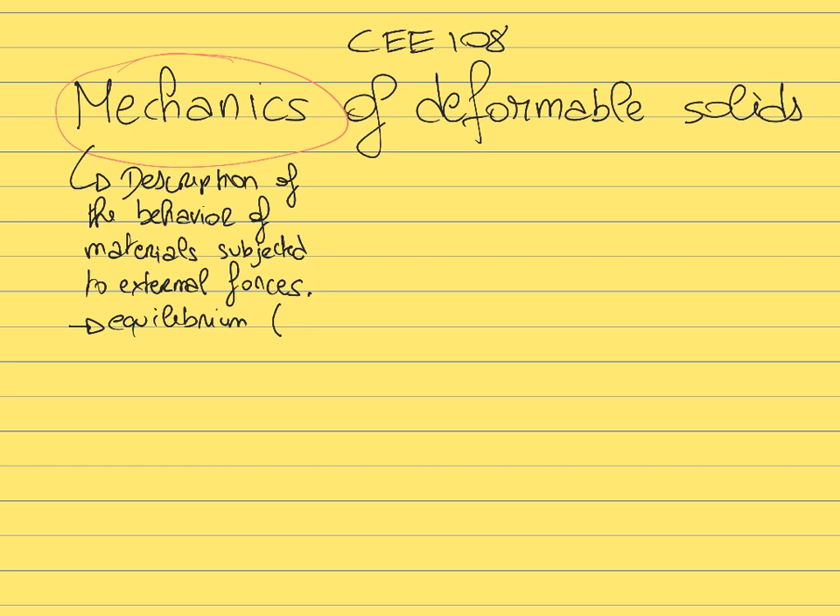For example, if you have a material that is placed on a table, and if you apply a force on this material, it means that, if the material is at equilibrium, the table will also apply a resistance force on this material that will be opposed to the force that you are applying. So the forces must be balanced. That's what you saw in the statics class. So statics is pretty much the fact that the sum of the forces and the sum of the moments must be zero if the material is at equilibrium. So that is statics.

The second thing is, if you apply some forces on the material and this material is not at equilibrium, then the second type of behavior that will be exhibited by this material is actually a motion. So that's the second thing that a material can exhibit. If you apply a force, this material can actually move. And so this is what we talk about in the dynamics class, that some of you might be enrolled in at the same time as this class.

So everything that describes the kinetics and the kinematics of motion of materials that are subjected to some forces and that tend to move due to those forces, this is what you describe in the dynamics class. The dynamics class will explore what is the relationship between the force and the moment that you apply to solids and the motion that they will exhibit as a consequence of those forces. So this is not something that we are going to talk about in this class.

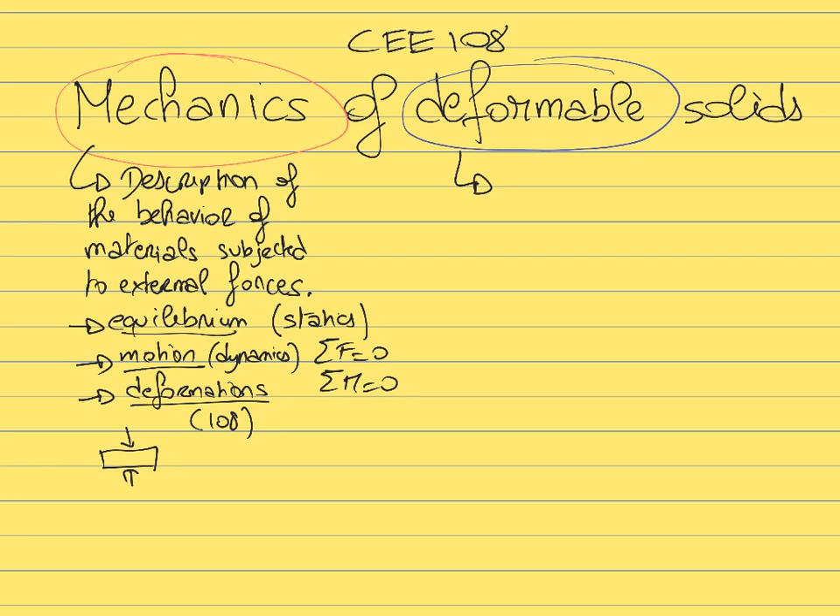So the second thing to define is, how do we define what is a deformation? What does it mean to be deformable? In this case, a deformable material is a material that can change either its volume or its shape. So those are the two types of deformation that we can have. Either a change in volume: for example, if you apply a hydrostatic pressure on a given material, this material is typically going to shrink.

And the other type of deformation that you can have is simply a change in the shape of this material. So for example, if you apply a shear deformation like this, materials can change their shape without necessarily changing their volume. So the deformation of materials can be either a change in volume, an elongation, a shrinkage, or a change in shape.

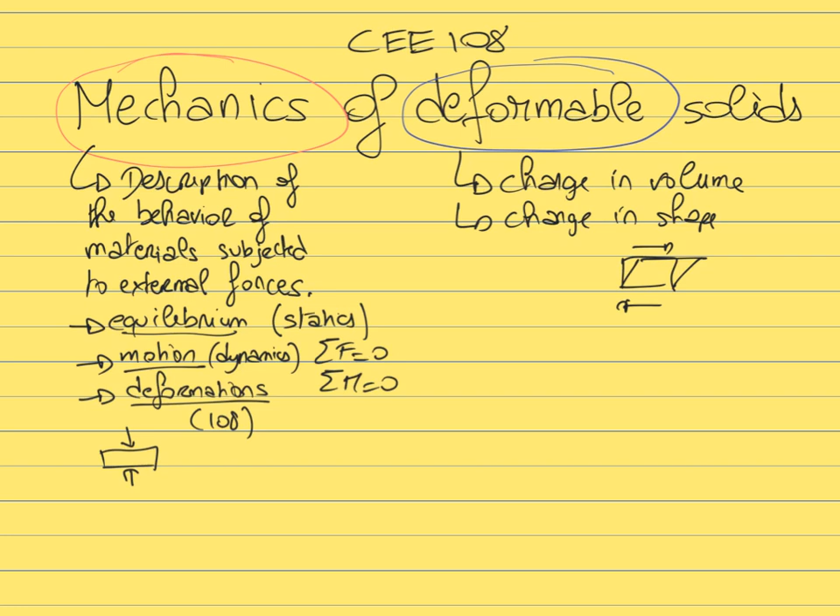So what we are going to talk about in CEE 108 is primarily two different consequences of external forces that are applied to materials. Once you have some external forces or some external moments that are applied to a given solid, the first thing that this external force will induce is that it will generate some internal load or some stress within the materials.

So you have a given material, you apply, for example, a three-point bending external force like this. Those are the external forces that are applied by an external agent, by something outside of the material. Those forces are going to result in some internal forces within the material itself, some internal load. So that is the first consequence of the external forces: you're going to have some loads that form within the material.

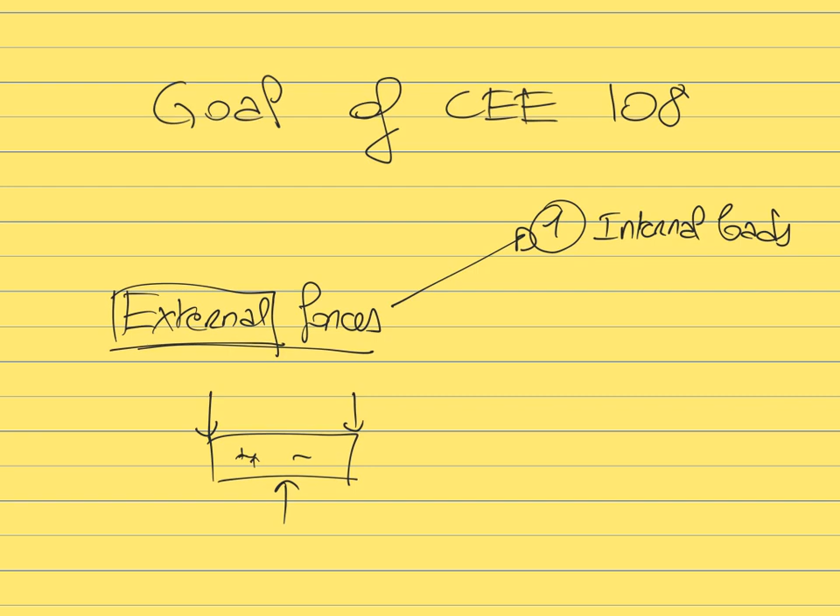Another way to describe this, which we are going to talk about in the next chapter, is that there is going to be the formation of some internal stress within the materials. And because of this stress, at some point there is a risk that the material might break. If the stress becomes too high, there is going to be a risk of fracture.

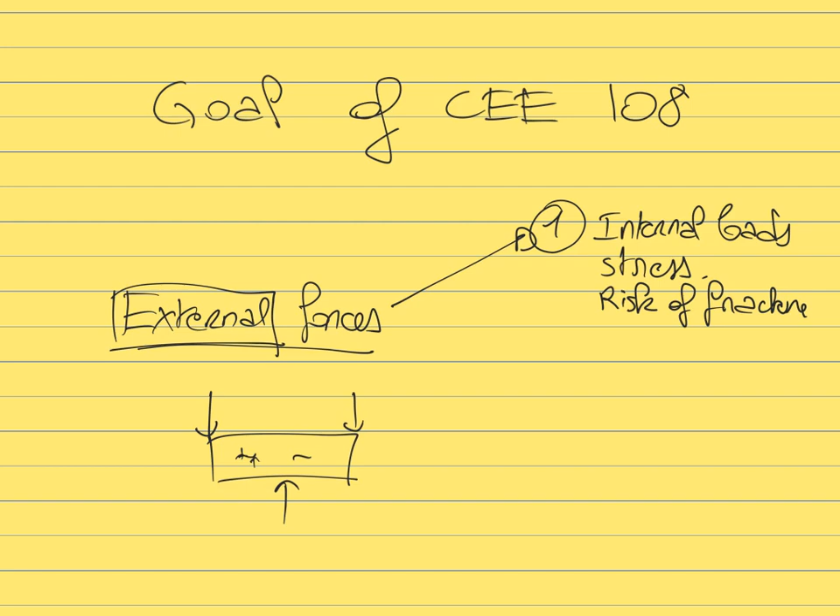So that's the first thing we are going to talk about in this class: if you have external forces, how do they induce an internal load, or can we find the relationship between the external forces applied to a material and the internal loads forming inside this material? And if we can predict the internal load and the internal stress as a function of the external forces, then we can predict how likely this material is going to break. What is going to be the risk of fracture?

The material is going to break if the stress forming within it exceeds the strength of the material. We're going to re-talk about this, but this is an important thing: understand the relationship between external forces and internal stress, which is useful to predict whether this material is going to break or not. So this is going to be about the risk of fracture.

The second thing that we are going to talk about is not simply the internal load and the internal stress, but also the other thing that a material can do, even if it doesn't break: these materials can be deformed. So we are going to talk about the internal deformation that a material can exhibit once it is subjected to some external forces.

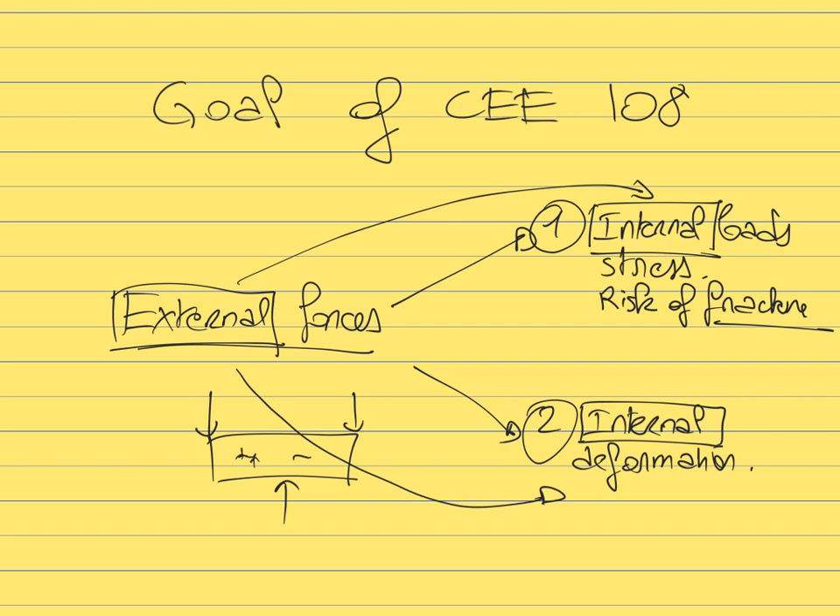So again, in this case, we want to find the relationship between the external forces or the external moments that are applied to these materials, and the internal deformation that occurs inside the materials. So basically we want to understand the relationship between the causes of the deformation, which are the external forces.

This is what is going to cause the deformation of materials. And we want to find the relationship between this cause and the consequence, which is going to be the response of the materials. And there's going to be two types of response that we are going to be interested in. First is the deformation of the materials: is this material going to be deflected, for example, or elongated or shrunk? Or what is going to be the internal stress, which is going to tell us if this material is going to break or not.

So this is going to be really what we are going to do primarily during this entire quarter. The goal of this class is to find the relationship or the link between the external forces that are applied to materials and the internal behavior of these materials. Internal load first, which is going to tell us if the material breaks or not, and the internal deformation, which is going to tell us if this material is going to be deflected or not, or how much deformation it is going to exhibit. And we want to find this relationship between the external things that are applied on these materials, which are the external forces and external moment, and the internal behavior of these materials.

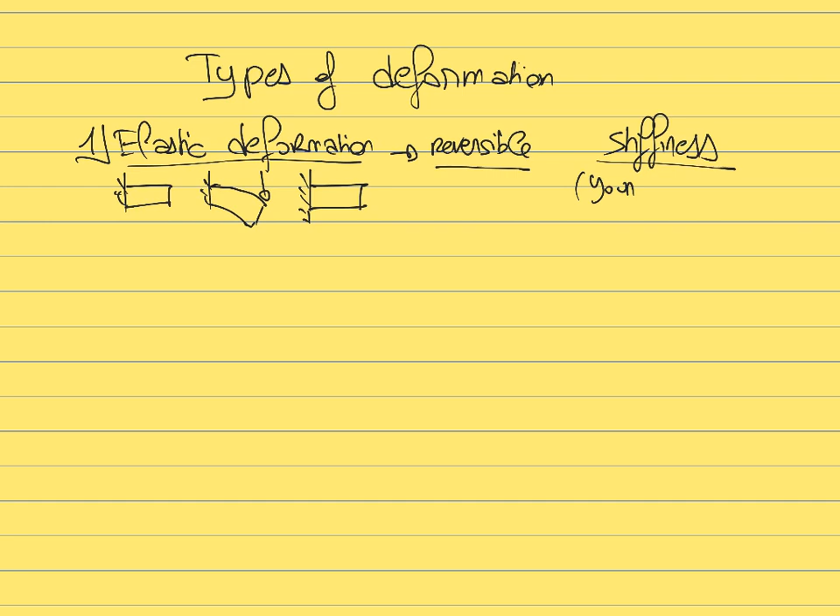So if a material is very stiff, then it will exhibit very little elastic deformation. And if a material is not stiff, then it will tend to exhibit a lot of elastic deformation. So the stiffness can be characterized and quantified by either the Young's modulus or the shear modulus, depending on if you characterize the stiffness of materials when subjected to axial load or transverse load. So those moduli will characterize how stiff the material is.

So we are going to talk about this again in a few chapters when we are going to talk about the mechanical properties of materials. But the first thing to remember is that what characterizes how much elastic deformation a material can exhibit is governed by its stiffness.

The second behavior that materials can exhibit if they are subjected to some external forces, another type of deformation, is that those materials can break. They can exhibit some fracture. So now we are talking about the case where you have a given member like this. You apply a given force to this material, and this material starts to break. So what does it mean to break? It means that you have a crack that starts to propagate, and eventually this material becomes made of two pieces. You used to have one single material, and now it becomes two pieces, which means that it has broken into two pieces. So this is the definition of a fracture.

You have created some new surface. So now, as a result of the fracture, you have some new surface that has been created. This new exposed surface that used to be inside the material is now exposed to the outside. So in this case, the deformation that is a consequence of fracture is not reversible. You cannot simply put back the material like this and hope that the material will become cohesive again. You would need to glue the material back, for example. So fracture is a non-reversible process.

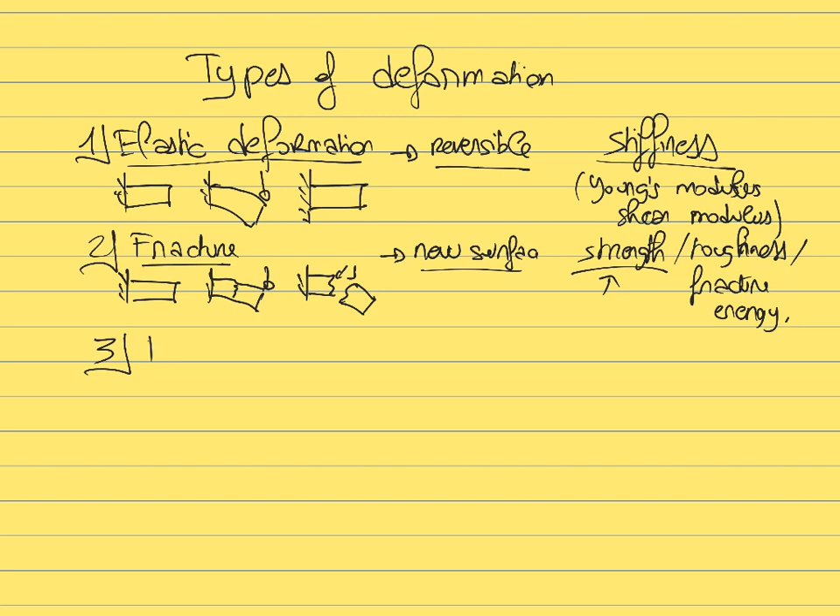Then the third type of deformation that can occur in a material is plastic deformation. So that's another type of potential deformation. So you consider still the same member. You apply a given force to this member, and this member is going to be deformed. But in the case of a plastic deformation, the material does not break, so this is not a fracture, but it differs from the elastic deformation because the plastic deformation is irreversible.

So that's the key aspect of a plastic deformation, is that unlike the elastic deformation, a plastic deformation is irreversible. Once you apply the load, the material is deformed, and once you remove the load, the material remains permanently deformed.

It doesn't go back to its initial shape or doesn't go back to its initial volume. So in this case, the key property that will govern the propensity for a material to be deformed plastically or not is going to be first the yield stress. The yield stress is the minimum stress that you need to apply to a material to induce some plastic irreversible deformation. Or another potential property is the hardness, which characterizes how resistant a material is to plastic deformation. If a material is very hard, then it's very resistant to plastic deformation.

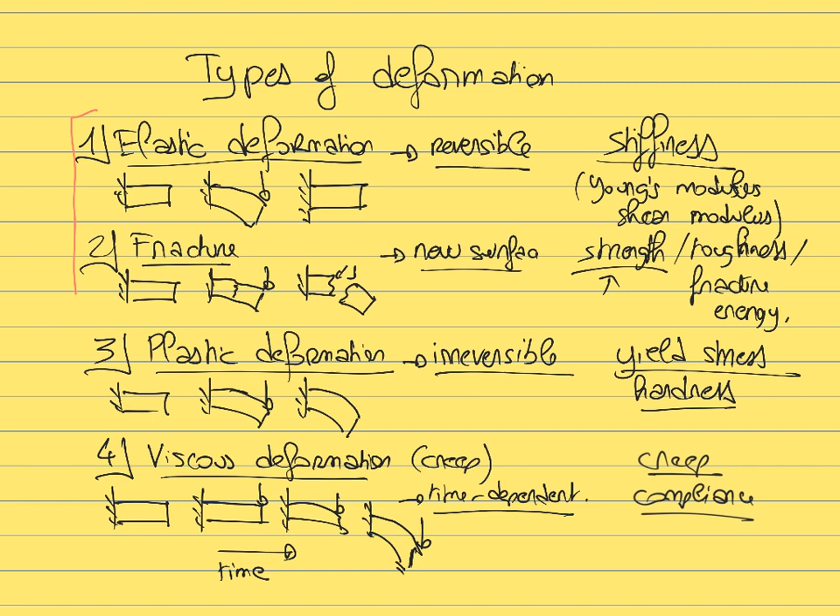And in this case, the key property that governs the resistance of a material to these types of viscous deformation would be, for example, the creep compliance, which dictates how resistant to creep a given material is when it is subjected to a constant load. So what we are going to talk about mostly in this class are primarily the first two types of deformation: the elastic deformation and the fracture. We want to predict how likely a material is going to break, and if it breaks, in which direction it is going to break. And we want to predict the elastic deformation that the material can exhibit when subjected to some external load. Those are the two things that we are going to focus on in this class.

One thing to note here is that there are different types of properties. There is the stiffness, which characterizes how stiff a material is. There is the strength, which characterizes how strong a material is. There is the hardness, which characterizes how hard a material is. In common language, if you say something is very stiff or very strong or very hard, in many cases, we use those terms interchangeably, as synonyms. But in the field of mechanics, those terms denote different things, right?

So if you say a material is very stiff, it means that this material is very resistant to elastic deformation. It doesn't tell you anything about whether this material is going to break or not, or about the risk of plastic deformation. It's just telling you that it doesn't show significant elastic deformation. If you say it's a strong material, it doesn't tell you anything about the elastic deformation. It's only telling you that this material can sustain very high stress before breaking, so it's not likely to break. So that's what a strong material is.

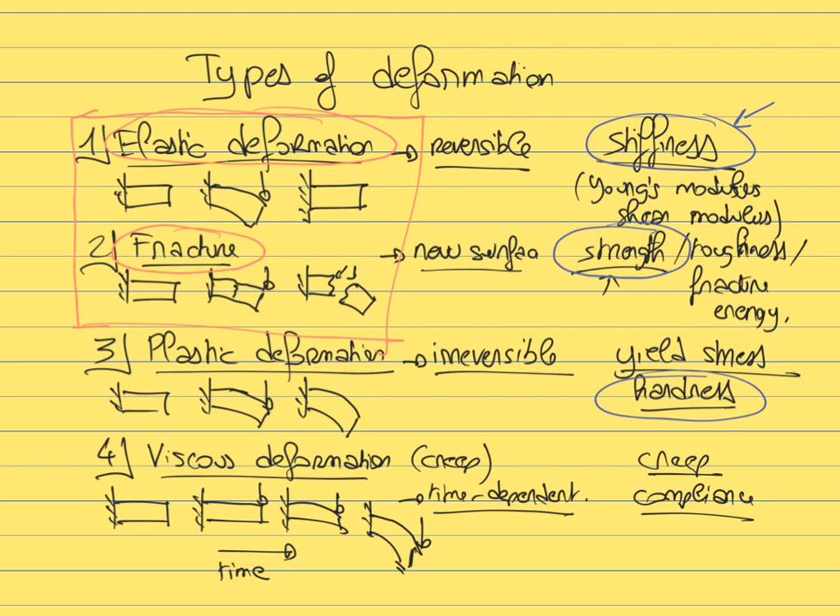So depending on the forces that are applied to a material and the direction of those forces, and depending on whether moments are applied or not to a given material, a material can be deformed in several different ways. Certain types of deformation will change the volume of the materials, while some other deformation will simply change the shape of the materials. So in this class, we are going to talk about primarily three different types of geometrical deformation.

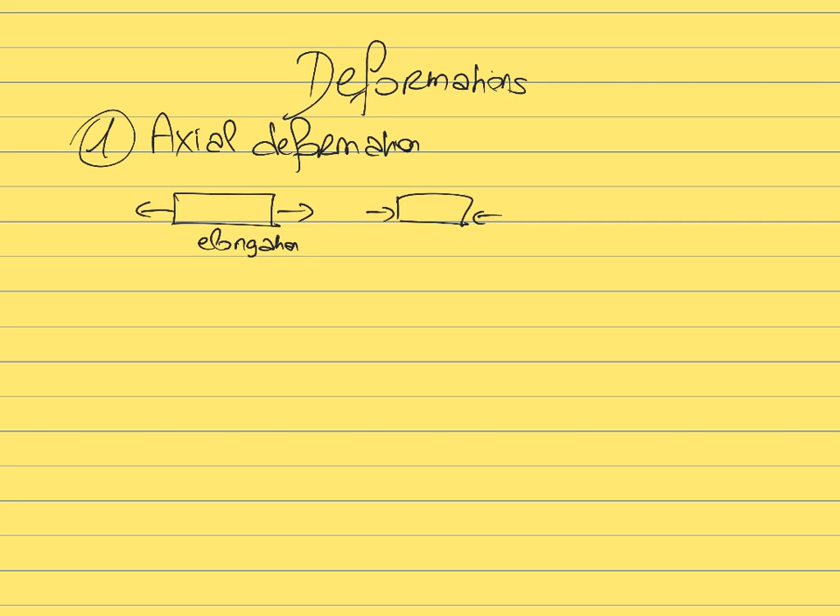The first one will be the axial deformation. So in this case, we will be talking about what happens if you take a given material and you apply an axial load like this. In this case, you will have an elongation of this material, or you can potentially have a compression like this, and in this case you will have a shrinkage of this member. So that's the first thing that we are going to talk about. This is what happens when you apply a load that is axial along the longitudinal axis of the material.

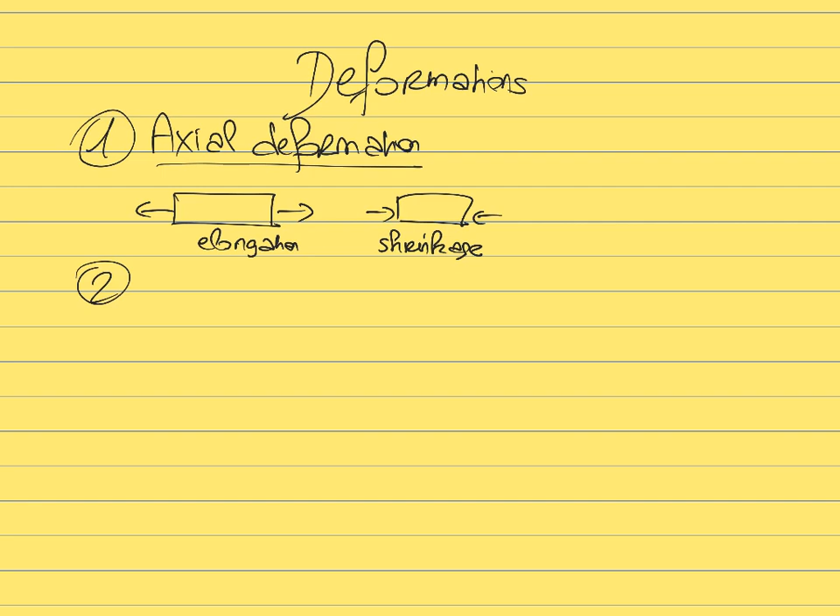The second type of deformation that we are going to talk about is what happens when you apply a torsion. So if you take a given material like this and you apply some moments like this to twist the material. So now in this case, if you apply a torsion, you will apply some external moment, and the response of the material will be to be twisted. So that's going to be the second type of deformation that we are going to talk about.

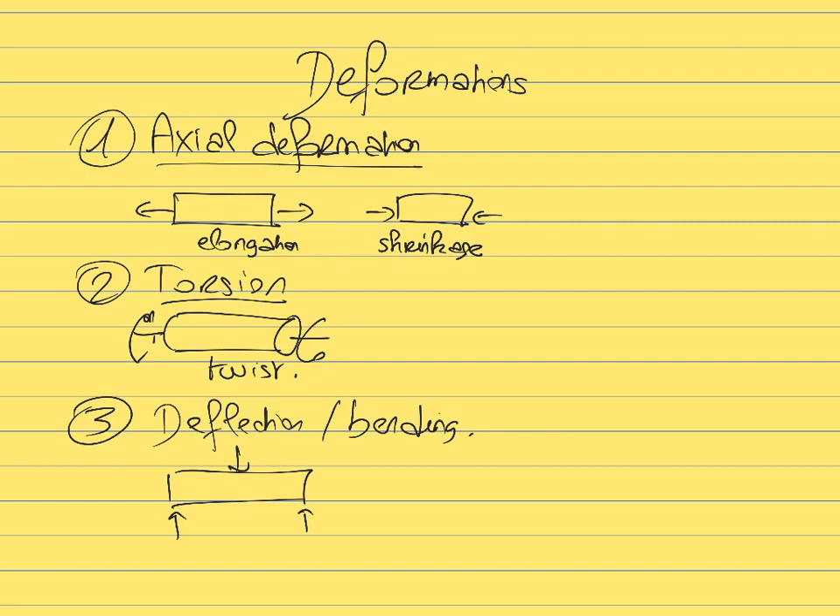And then the last type of deformation that we are going to talk about is the deflection or the bending of the materials. So in this case, there are two main ways you can deflect a member. Either you will apply, for example, some lateral force like this, which will tend to deflect a material like this, or another way is to apply some moment like this, which will tend to make a material that used to be straight curved. So that's another type of deflection. So that's what we are going to talk about in the bending chapter.

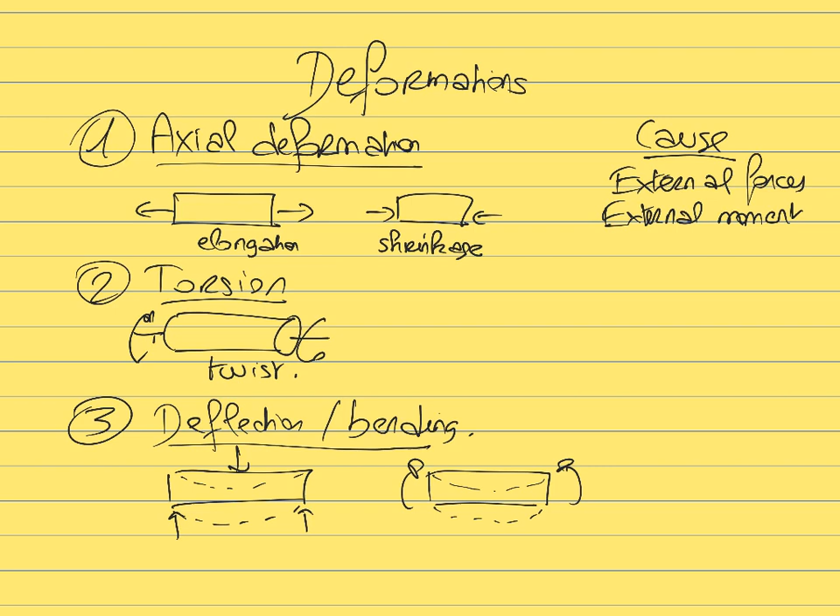And for all of those chapters, it's going to be following a pretty common organization, where we will want to understand what is the relationship between the cause of the deformation, that is to say the external forces or the external moments that are applied to this member. So that's going to be the cause, and we will want to understand how this cause is going to induce some stress, and what is going to be the value of the internal stress within the material as a function of the external forces that are applied. This is what is going to tell us what is the risk of fracture of the material. Is this material going to break or not?

And the second thing is we will want some mathematical relationship that can relate the cause, the external forces, to the deformation itself. So this is what we are going to talk about in the following chapter. But the way to characterize the deformation is the strain. And in this case, it's going to tell us how deformed the material is, how deflected, how twisted, how elongated, or how shrunk the material is. So this is going to be about the deformation.

And in these two cases, in the case of stress and in the case of deformation, we will want to derive some relationship that relates the cause to the consequence. So the external forces to the internal stress, or to the internal strain, the internal deformation. So that's what we are going to see in this class. So the first thing before all of this that we are going to see in the next chapter is that we are going to review the key concepts of statics that you need to remember to solve deformation problems. So that's what we are going to see in the next video.